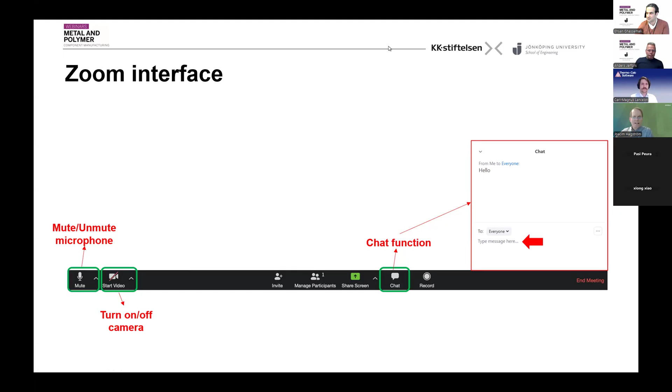See if I can do this.

Hello everyone. This seminar today is part, the final part, of a pre-study, genomförbarhetsstudie, within the program Metals and Minerals, sponsored by Vinnova in Sweden.

Joachim, I appreciate if you share your slide or screen. I do not do that. Just need to click on share. Do I have to leave the presentation mode then? Possibly, I thought I pushed share. I think you need to confirm by selecting a screen to share. Okay, I think it's starting. We practiced before, but yes. Okay. Slideshow. Okay, great, perfect, it works. Sorry for this.

This seminar is within this pre-study called Thermodynamic Simulations for the Development of Low Carbon Emission Scrap-Based Aluminium Alloys. The participating parties were the Swedish Aluminium organization with Peter Benson, Thermocalc Software with Carl Magnus and Yang, Jönköping University with Anders, Ehsan and Lucia, and from Swerim myself and my colleagues Sten Wessman and Fang Ting.

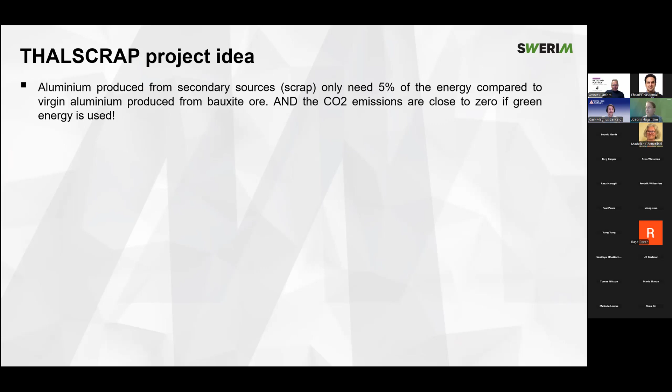The way to go is to increase the usage of scrap, also in high performance, high pressure die cast and wrought products - the mega and giga castings in automotive industry, for example, and extruded profiles and rolled sheet materials, where today it's mainly virgin metal.

The main challenges to do this are the accumulation of unwanted elements like tramp elements, impurities, and non-metallic inclusions, which can have a negative effect on final properties.

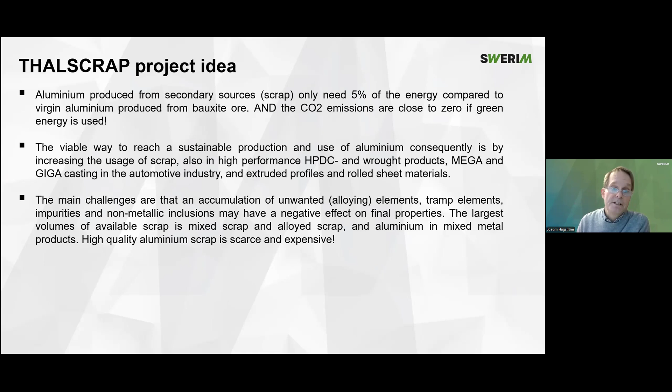The largest volumes of available scrap are not the high quality, well-sorted scrap - it's the mixed scrap and alloy scrap. And already today, the high quality aluminium scrap is expensive, and it can be more expensive than virgin metal.

In this situation, thermodynamic calculations and simulations are useful tools to understand and help predict the influence of variations in composition on microstructure and properties.

This is maybe the core of our project idea: the thermodynamic simulation tools are dependent on high quality information, phase diagrams, and secondary alloys contain more elements and in larger amounts than the alloys we have used in the past. So we need to develop better data.

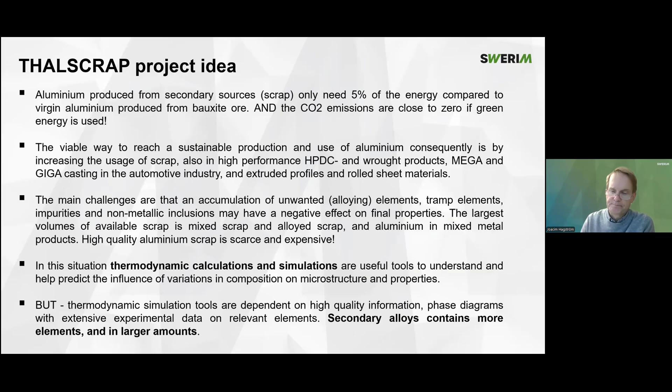Our project aimed to make a gap analysis of available data to understand where we need to make more experiments. This was one of the most important tasks of the project.

We also wanted to improve the competence in industry and among researchers in Sweden, and therefore wanted to produce educational media that can be used for meetings with industry.

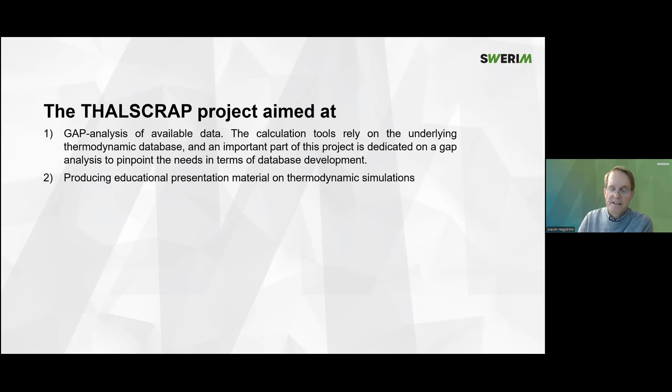The third option was to meet the Swedish aluminium industry, to give seminars and to tell about basic metallurgy and phase diagrams and how these thermodynamic tools can be used.

We also wanted to create demonstration cases to exemplify how alloying elements and impurities affect processing parameters and properties.

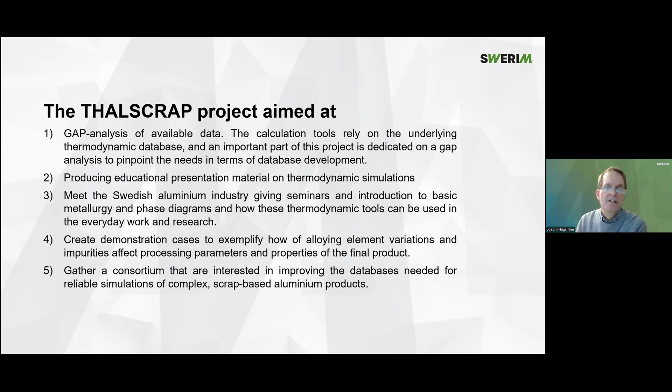One final important thing was also to gather a consortium interested in working with these issues, improving databases needed for simulations of complex scrap-based aluminium products.

Everybody talks about scrap, and we have to use more scrap. The hard truth is that scrap is not really available for everything, so we have to make the low quality scrap available for more high quality products.

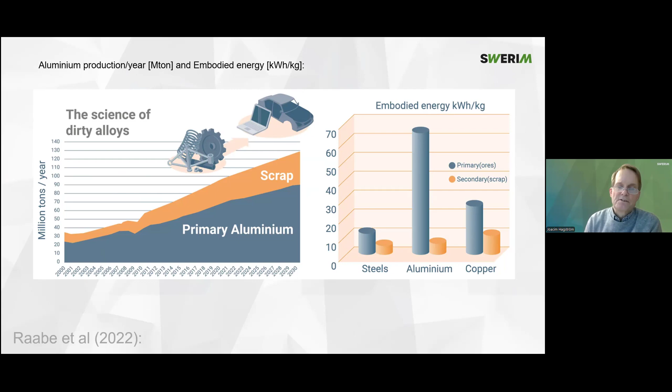This is the forecast of aluminium production in million tons. We will see a quite large increase in the amount of aluminium produced due to automotive electric cars, automotive transports, and many other areas.

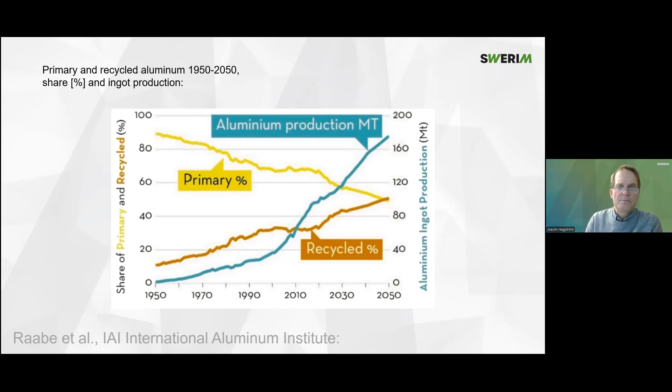We see that the recycled content, according to this graph from a presentation by Raabe, shows that by 2050 we can expect 50% of sources coming from recycled material. So we really have a huge job to do to increase the amount of recycled material.

The project deliverables included a review of existing computational tools for thermodynamic simulations, and user cases with examples of how simulations can be used in industry. This will be presented by Thermo-Calc Software today and Jönköping University.

We also have a review of competences, skills, and tools in the aluminium industry. We made several trips to meet industry and researchers at research and innovation centers to understand the situation.

Now we are here at the final workshop to discuss the results and possibilities. So thank you for...

I'm ready with my part then. Thank you. Good, great, thank you.

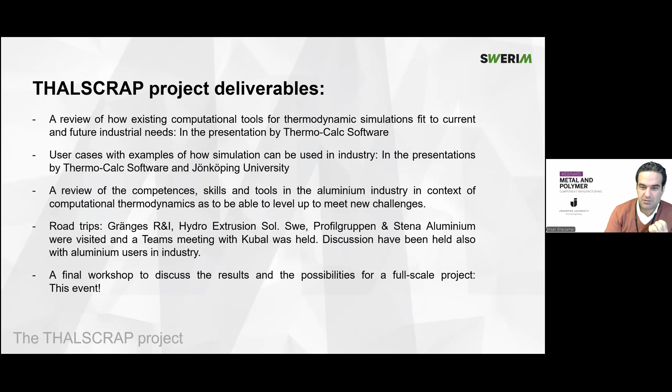Thank you, Joachim. Now we talked about THALSCRAP and Thermo-Calc. Now it's time for Carl Magnus to tell us about phase-based prediction for aluminium alloys, the activities we did also during the THALSCRAP project.

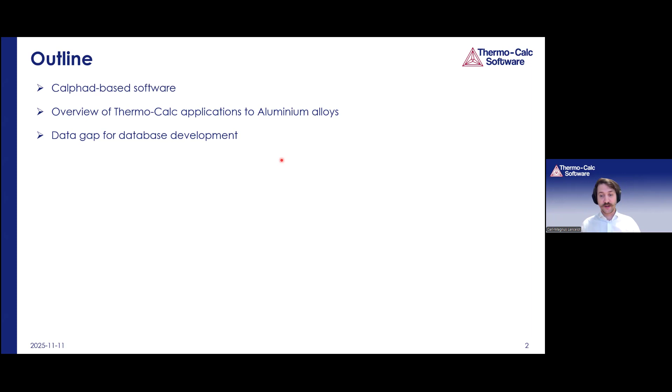Then there are two points, the two work packages that we at Thermo-Calc had during the project. One was to create an educational package that serves as an overview of different ways you can apply Thermo-Calc in the aluminum industry. I will give you an overview of these different applications. The second package is to identify data gaps for improving the database. We have identified a couple that we could work on to improve the thermodynamic predictions in the future larger scale project that Kim introduced.

So why should we work with computational thermodynamics, and who could benefit from using this kind of predictions? Actually, most of the life cycle in the aluminum alloys: the alloy designer who will prepare the chemistry and make a cast, the component producer who takes this cast and makes it into a shape and heat treats it, the component user who takes this component and puts it in a product.

Probably not the end user, the end user would be me who buys a car and drives the car, but also the recycler who will recycle the scrap and then that will go back into the alloy design.

And why should we use computational thermodynamics? Well, we can minimize the need for trial and error, experimental trial and error. That can be very costly if you have to turn off production in order to do experimental trials. It's better to make predictions beforehand in order to narrow down the experimental needs. So you can save time, you can save your development time from the drawing board to the final product.

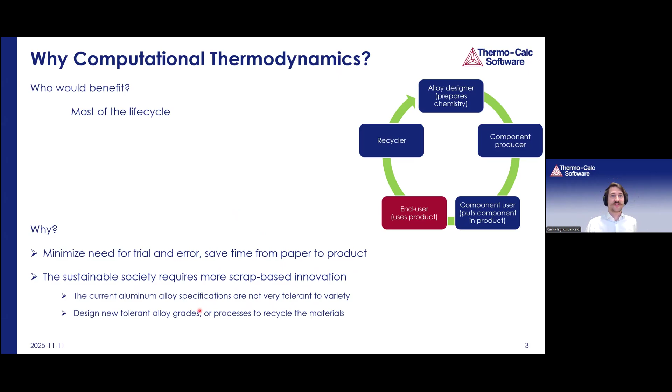And also, as Kim has already introduced, we need to use more recycled aluminum. So in the future sustainable society, we will need more innovation for scrap-based aluminum alloys. The current aluminum alloy specifications are not very tolerant to chemical variety, especially the wrought alloy grades. These can be very sensitive to impurity contents. So it will be important to design new alloy grades that are impurity tolerant, and also design processes to recycle these scrap materials.

Now I'll give an overview of the databases that are the foundation of these predictions we can make in Thermo-Calc. These are CALPHAD databases. CALPHAD stands for calculation of phase diagrams, and we work with phase-based properties. These properties are evaluated for all phases that can appear in a type of alloy. They are developed using experimental data and also atomistic simulations, and they are described as a function of chemistry, temperature, and to a limited extent also pressure.

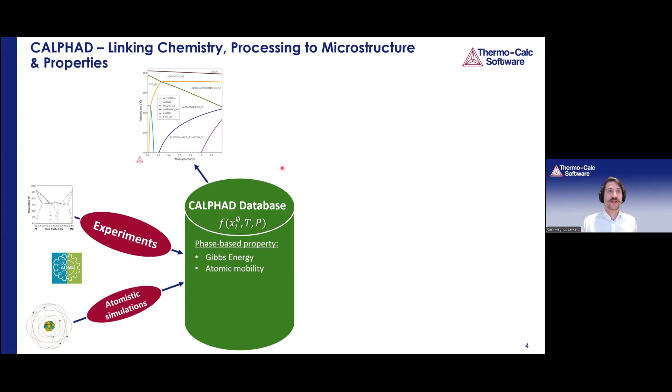The properties are the Gibbs energy, which can be used to derive all kinds of thermodynamic properties, and also the phase equilibria, so we can calculate phase diagrams, and also atomic mobility, so we can simulate the kinetics of phase transformations, and also some thermophysical properties such as molar volume, viscosity and surface tension of the liquid phase, the melt, thermal conductivity and electrical resistivity of the alloys. We're currently working more and more on introducing elastic properties into the databases.

With this, we can simulate the microstructure you will have in the alloy. We can simulate processes such as additive manufacturing or casting, and we can evaluate the properties of the resulting materials and evaluate the performance of the materials. So that's just a very brief overview and summary of the predictions we can make with this CALPHAD software.

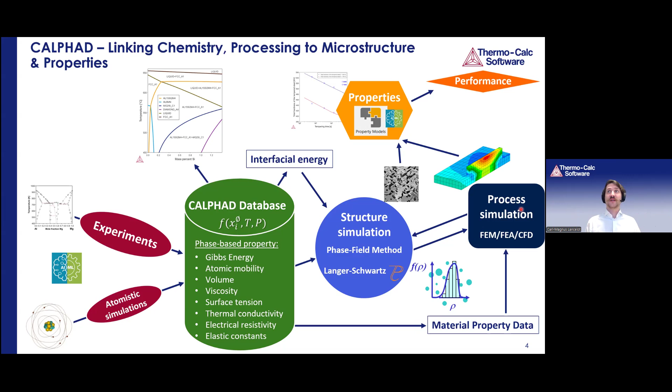So I want to talk about our aluminum database, and our main developer is Yang. During this project, we updated this database to version 10 with some improvements that we managed to identify.

We have 48 elements, all shown here marked in the periodic table. We have aluminum here, then the major alloying elements are green, and the yellow ones are either minor alloying elements or impurity elements. There are over 300 binary systems assessed in this database, over 100 ternary systems, a couple of quaternary systems, and also over 700 phases described in this database.

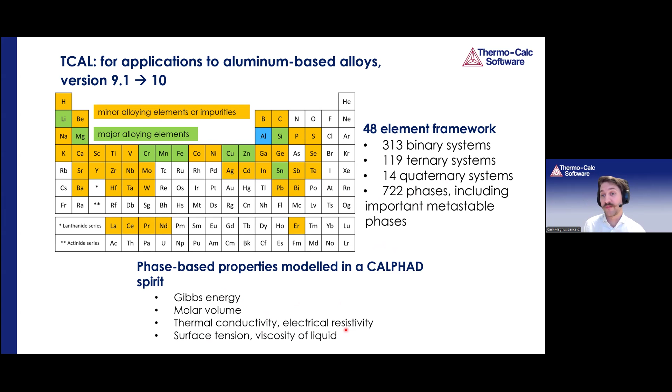So for all of these phases, we have all of these properties described as a function of temperature and chemistry. The properties are the Gibbs energy, molar volume, thermal conductivity, electrical resistivity, and the surface tension and viscosity of the liquid. We have not yet gotten to adding the elastic properties, but that's on the roadmap for the next update of the database, the elastic constants.

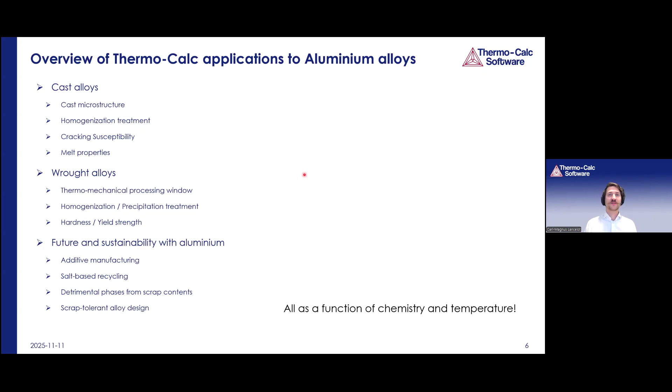I will give an overview of the different applications we can do on cast alloys and wrought alloys, and also talk a bit about the future of aluminum and sustainable aluminum alloys, including predictions we can make as a function of different chemistry and temperature.

For cast aluminum alloys, we want to simulate the cast microstructure, which we can do easily using the Scheil-Gulliver equations in the Scheil calculations. We can simulate dendrites, eutectics, and intermetallic compounds forming, including the segregation profile during the growth of these dendrites as a function of cooling rate.

We can bring this information into a diffusion simulation to simulate the homogenization of this cast structure, simulating the flattening of these segregation profiles. Here is an example for 12 hours at 540 degrees Celsius, and also the dissolution time for detrimental intermetallic compounds such as the Mg2Si phase.

Also very important to cast alloys is the hot cracking or hot tearing susceptibility. We have a model in the software for this, with different kinds of models you can select, and we can calculate this as a function of different chemistries. In this example, we have a multi-component alloy with many impurity elements, and we vary the copper and zirconium content to see how the alloying lowers the hot cracking susceptibility.

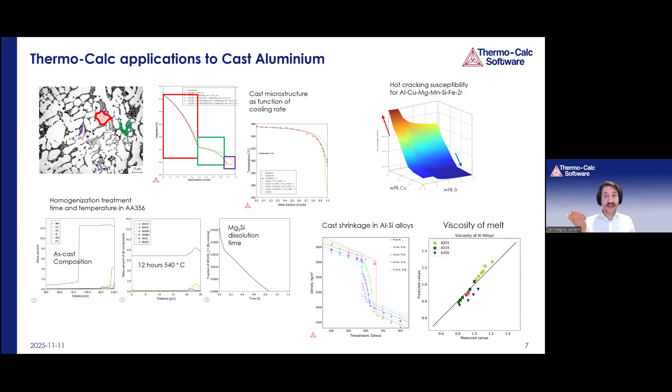Also important are the casting and melt properties: the cast shrinkage, so the increase in density or decrease in volume during solidification, or the viscosity, shown here for a couple of different cast alloys. This is very important for the behavior of the melt, the flowability, and so on.

Next, a quick overview of applications to wrought aluminum alloys. For wrought aluminum alloys, we do thermomechanical processing, so we can identify processing windows. This example is on alloy 6063, but you can do this on any alloy grade. Here we show the equilibrium phase fractions as a function of temperature, representing the microstructure you will have at different temperatures, so you can identify temperature limits.

For example, here is the solvus temperature for the formation of Mg2Si, which is a problematic intermetallic compound, setting a lower temperature limit for a processing window. Then we can have an upper temperature limit where we get melting or incipient melting of the alloy. So we have a processing window here, for example for extrusion or other types of processing, but also for homogenization treatment.

We can also simulate the homogenization treatment of this alloy. Here it's interesting to convert the problematic beta particle into the alpha particle, which is better for the properties. We simulated this at 550 degrees, which is between the beta and alpha phases. Then for wrought alloys, you usually do a precipitation and age hardening treatment at a lower temperature, such as 200 or 180 degrees.

We can simulate this in the precipitation modules. Now we're looking at a 6005 alloy grade and the precipitation of beta double prime needles. This is a metastable precipitate, and there's a transformation between spherical and needle morphology. Here we look at the number density of the particles as a function of time during the precipitation treatment, and also the mean radius and aspect ratio of the particle as a function of time.

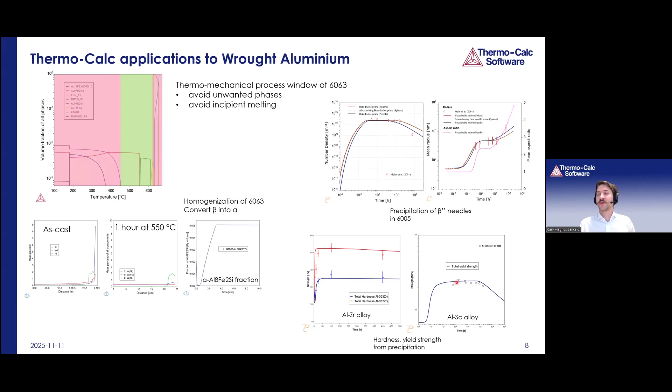These are examples on binary alloys, aluminum-zirconium and aluminum-scandium. Here we are simulating precipitation of aluminum-zirconium precipitates and calculating the Vickers hardness for two different chemistries. On the right is one of our oldest examples of the yield strength model, where we simulate the strengthening effect of the aluminum-3-scandium particles as a function of time.

I want to move on to talk a bit about the future aluminum industry and sustainability with aluminum. 3D printing is becoming more popular.

It's become more popular to try to qualify aluminum alloys for 3D printing. We have this integrated additive manufacturing module where we can simulate the laser powder bed fusion process using all of these different properties that I have just showcased.

Here we have an example of an aluminum silicon 10 magnesium alloy. We can design the printer parameters or design new printable alloys using the modeled melt pool behavior as a function of different laser power, wavelength, laser beam shape and beam radius, and different scan strategies such as scan speed, hatch spacing and hatch rotation. We can model all of this and optimize the printing parameters to avoid defects such as lack of fusion and keyhole porosity.

Moving on a bit towards recycling now, salt fluxes are used commonly to clean the aluminum melt, and we have descriptions in our databases that can help model this, so we can design the salt chemistry for optimal cleaning of the aluminum melt.

Here we have a potassium chloride mixed with magnesium chloride, and we're increasing the proportion of magnesium chloride in the salt flux to look at removing sodium and calcium impurities from the melt. We can see we will reach a satisfactory value here while also maintaining the magnesium content in the melt, since increasing the magnesium chloride in the flux doesn't add very much magnesium to the aluminum melt.

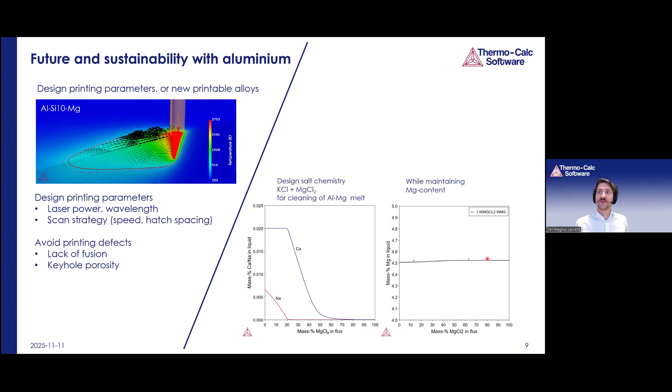Looking forward into the future of scrap-tolerant aluminum alloys, there are several publications in the literature where Thermo-Calc is used to design new types of scrap-tolerant alloys. These are mostly cast alloys, because cast alloys are a bit easier and more tolerant to impurities. I wanted to highlight at least two papers here.

One is by Pavel Shurkin et al. from 2021, where they looked at an aluminum zinc magnesium alloy. Here is a heat treatment window for the alloy, where the dashed lines are the curves of the volume fractions of the phases. We have a treatment window with 100% FCC phase, and then adding iron and silicon impurities removes this processing window so it's no longer processable. They made further predictions to design a new high strength, iron-silicon-tolerant aluminum alloy.

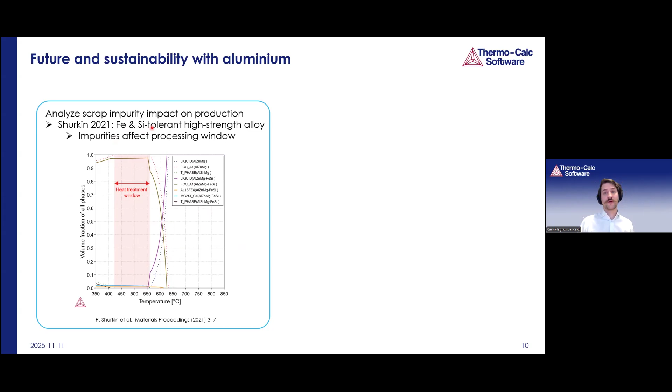Another more recent paper, quite nice, is by Jon Michael Sanchez et al. from this year. They designed a fully post-consumer scrap-based cast alloy. They had sorted scrap into maybe six different categories with different chemistry ranges, and did a high throughput calculation in Thermo-Calc to screen the properties of 94 different chemistries.

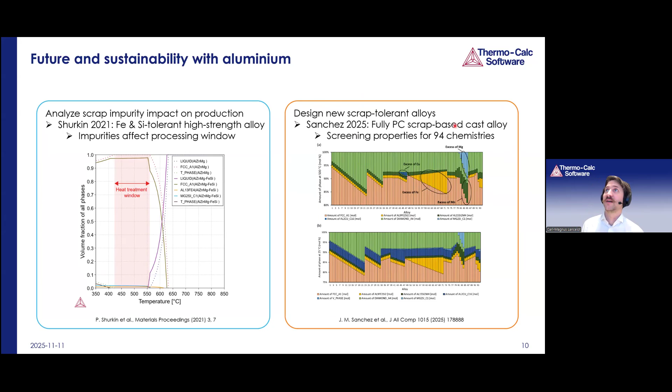They made these quite interesting column diagrams showing the volume fractions of all the different phases at different temperatures, here at 500 degrees and 25 degrees. At high temperature you can look at the detrimental phases that will form during casting, and also homogenization windows. At low temperatures you might look at other phases that can be problematic. They also looked at other important properties such as the density of the alloy, producing a castable, good strength, fully scrap-based alloy using these tools.

Coming back to our work packages, that was a review of the current status and capabilities with our databases and tools. I want to talk a bit more about the next step, the gap analysis, which was mainly performed by my colleague Yang Yang, the database developer here.

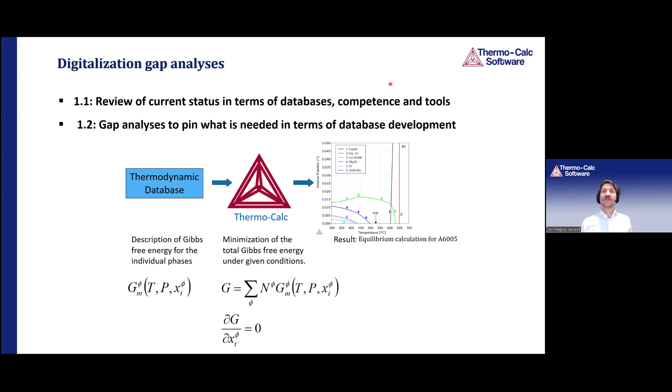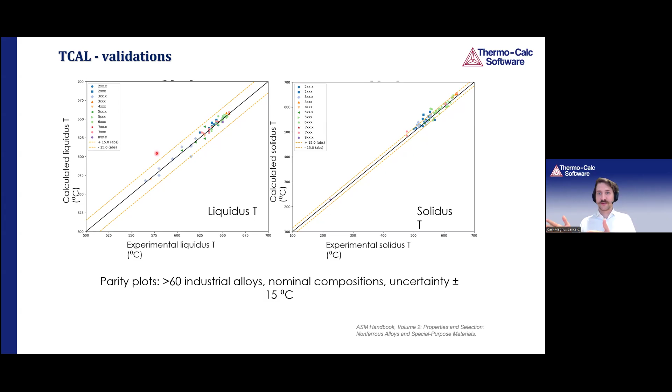She's doing the validation work of the database, validating it for many different multi-component alloys, calculating important properties such as the solidus and liquidus temperature for a large number of commercial alloys, both wrought and cast. We see pretty good agreement, within plus or minus 15 degrees for solidus and liquidus, and we can also see which outliers appear in the predictions, which helps identify areas for improvement.

Most importantly, in order to improve predictions on multi-component alloys, we need to identify critical ternary systems important for these scrap impurities that contaminate the alloys. Yang managed to identify quite a few and improve a few of them during the project.

One of them is aluminum iron manganese, which was improved for version 10 of the database. There was some deficient data in a certain temperature range where the data points were conflicting, possibly due to contamination in the literature data points, so she made critical judgment calls and improved the description.

Aluminum chromium iron was actually not described before because there was limited data available, but now with new data we were able to assess this ternary system and add it to the database, which will be very important for predictions involving chromium and iron based intermetallic phases.

Another ternary, aluminum copper manganese system. There's very deficient data available from the 60s, so this is a system where we have an opportunity to create new data. If we can create high quality ternary data, we could rule out some inconsistencies in the old data.

And improve this system. Aluminum copper iron system was also improved during this project. We managed to improve the copper solubility in several aluminum iron based intermetallic phases, which is very important for scrap based alloys. Another ternary, aluminum iron magnesium system.

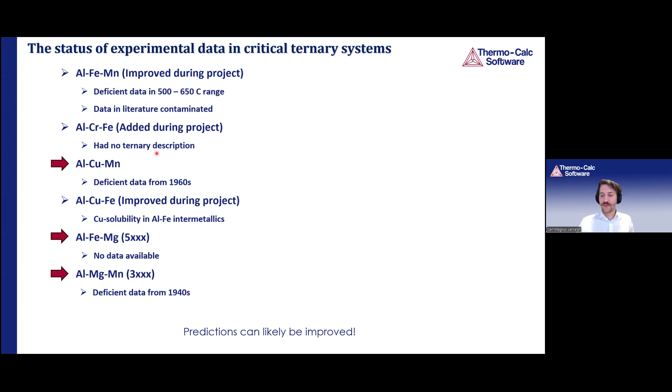And what experiments do we need to do? I want to emphasize that it's most important to generate high quality ternary alloy data, much better than multi-component alloy data. Multi-component alloy data is good for validation of the database and identifying areas of improvement, but high quality ternary alloy data is important to be able to improve the database.

So a very cheap method is to make isothermal heat treatments. You define, here's a schematic ternary.

We lost your sound, Carl Magnus.

And we also have a ternary intermetallic compound here, and we have some two-phase regions with the green tie lines, and also these red triangles are three-phase triangles. So if we can prepare sample chemistries to try and pinpoint them into these two-phase or three-phase regions, we can gather a lot of ternary phase diagram data in a single furnace heat treatment.

And we can also put samples for different alloy systems in the same furnace. Then if we do this for a couple of temperatures, 3 or 4 temperatures, then we have gathered a wealth of data that we can use to assess these ternary systems.

Combine it with some XRD and maybe EBSD, that will help phase characterization a lot. And also DSC, or even cheaper DTA analysis, differential thermal analysis, is used to identify phase transformation temperatures.

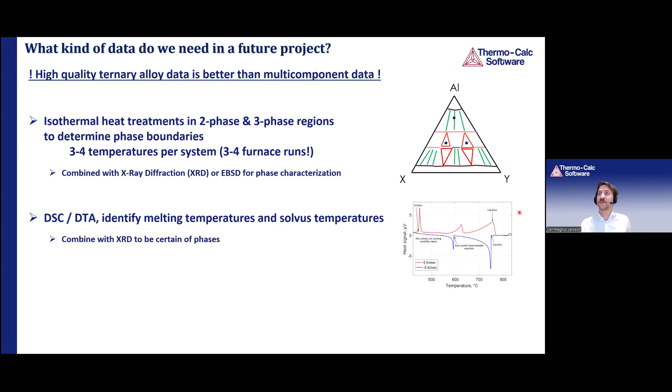So here we can scan the liquidus projection of a ternary system, so we can get the liquidus and the solidus, and also some solid phase transformation temperatures. We can combine it with XRD if we want to really be certain of the phase characterization there.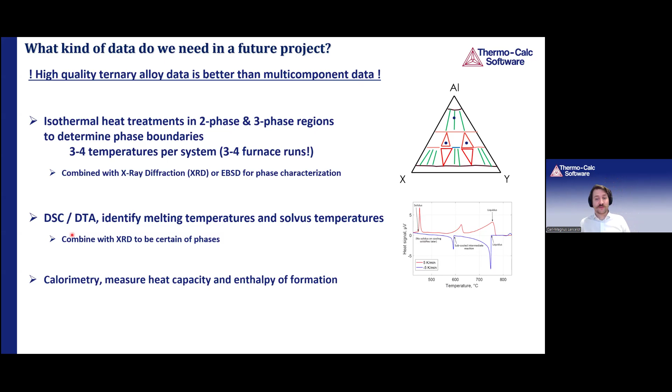And maybe a bit more expensive method, but also very useful, calorimetry. We can measure heat capacity and enthalpy of formation if we find some new ternary compounds. This will generate very important data for the assessments.

All right, and that was all that I had to present about our two work packages in this project. Thank you all for listening to me, and I hand back over to Esan and Anders.

Perfect. Thank you very much, Carl Magnus. Very interesting insights on Thermo-Calc, and as we know, and as you also briefly mentioned, the capabilities of Thermo-Calc are endless, sounds like, and a lot of potential to use it more, even for scrap material in aluminium.

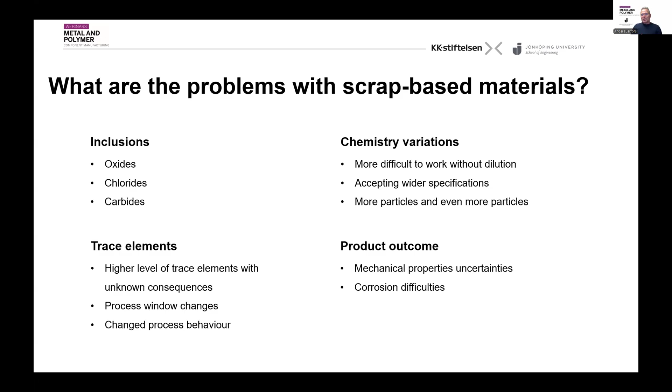And this has led to a normal way where you either dilute or downcycle. So you have a heat, a source and sink paradigm that we've been working with so far. This is a source and sink diagram where you have the scrap source types on the left: 1100, 3000 series, 5000 series, 6000 series, and then your typical cast materials with 319, 356, 380, and 390 being the sources. At the bottom you have the sink alloys.

If you take, for instance, the 6000 series, 6061, you can actually produce an 1100 series material. But what will be limiting there is the copper and silicon content. That limits, as you can see by the color, that you can take no more than 10% of this material because it's limited by copper and silicon. So with wrought materials, the 1000 series, often magnesium is the limiting element. And if the source is coming from cast alloys, making wrought materials is very challenging because copper and silicon are the challenges.

Now, if you look at the wrought materials, take the 5000 series, for instance, and choose the 300 series cast alloys as the sinks, you see magnesium is also dominant here. But because the cast alloys have a higher tolerance for these materials, you can actually increase the amount of wrought materials used. So you move up and turn more toward the green or blue range of alloying elements. This has been, so to say, the forgiving paradigm.

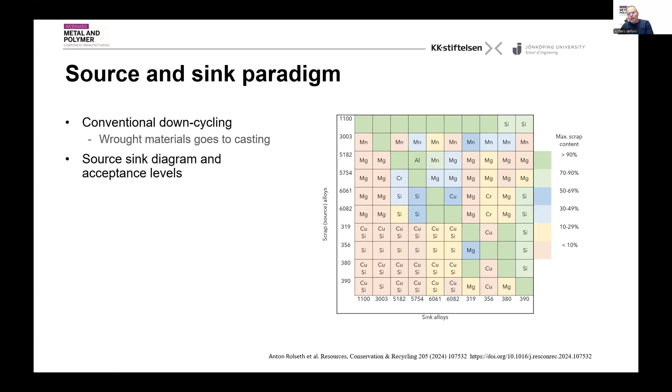Now what happens is that there's been some work where you take a shredded car and remove as much of the iron and all the non-metallic impurities that you can, and you end up with the aluminium composition. So what we have here are three different scenarios.

If you take the internal combustion engine data, these are based on experimental data where people have shredded cars and separated out the internal combustion components. The leftmost bar shows just above 5% silicon in the Zorba scrap. You have 0.5% iron, 0.7% copper, 0.3% manganese, 0.75% magnesium, and 0.41% zinc in the scrap that comes out of this shredded material. This is what you need to work with.

This is what comes out as Zorba. But if you look at the cast alloys, which is the downcycling part, they typically have maybe 10% silicon, meaning you need to add silicon. If you take data from our recyclers, 20% of the energy that goes into recycling the material, making cast alloys from Zorba scrap, is the addition of silicon.

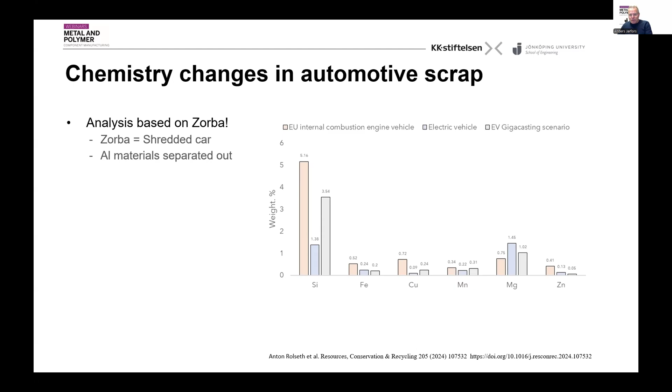So if you take the next slide, the conclusion is that we have a number of alloying elements in the aluminium scrap mix. If we just look at electrification, we have less copper, less silicon, but more magnesium. And remember, magnesium was one of the elements that put a limitation. So if we put scrap back into our alloying element cycle, it will be even more limiting because of the increment in magnesium content.

Now gigacasting won't really strongly affect that, but it will put some silicon back into the system, and there's a window here. If we start using alloys with less silicon, we can also reduce the carbon footprint. This is an interesting concept.

Now what we saw from Kim's presentation is that there will be a deficiency of aluminium. Our studies looked at closed recycling in the automotive industry, a closed circuit recycling system. We can go to the next slide.

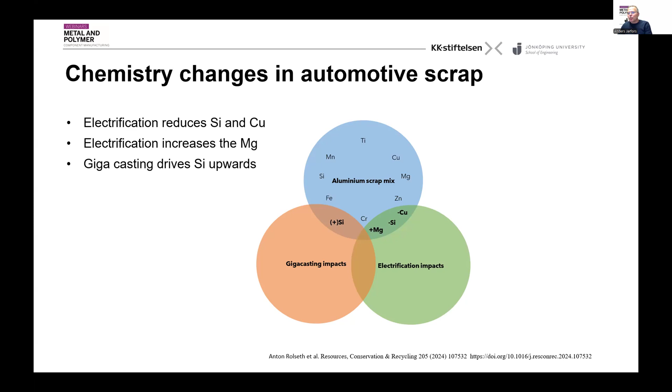We can see that the deficiencies in 2060 would be in the order of some 20 megatons of aluminium. But there isn't really that big a deal between the combustion engines and the electric vehicles and the mega casting scenarios. So this is something that's about the same level of issues.

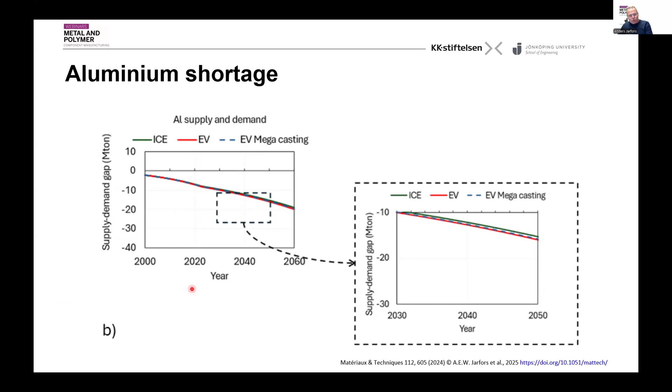But the interesting portion is what happens with the alloying elements, because the scrap that comes back from the cars will be richer in magnesium than what the automotive industry actually is using. We can see that silicon around 2037 will be higher, and magnesium will be higher. So one of the abilities we need to work with is to use the scrap as an alloying system, being able to do more complex alloys and returning the scrap into a cycle of more qualified alloys. So that's the challenge.

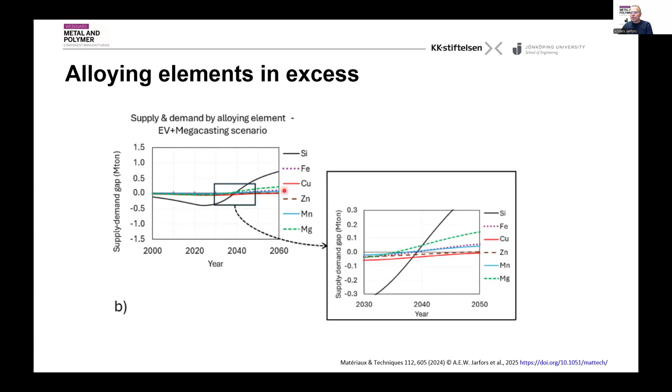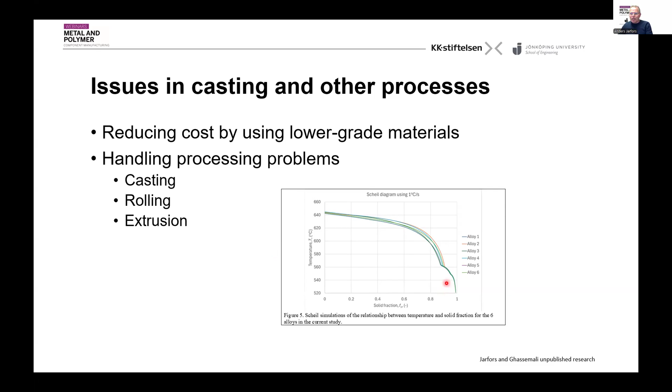This is an example where we've been calculating the hot tearing index of the materials as a function of different compositions. This is a plot we've done using Thermo-Calc and the Scheil equations, and we're working on our own model in order to produce this. We've been doing 500,000 of these Scheil calculations, trying to show how the various elements are behaving in this system. So you can get data out of this as a qualitative measure, but there are also issues in actually fitting this to the experimental work as well.

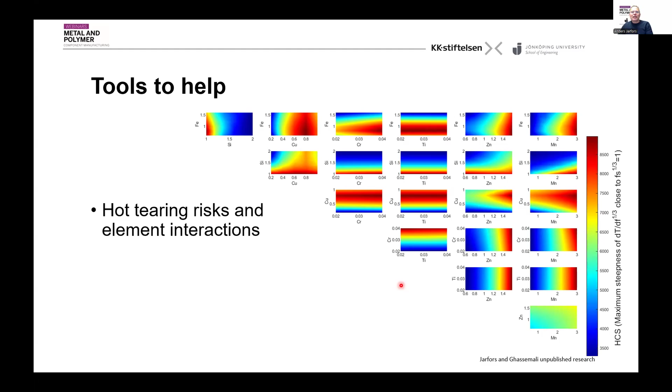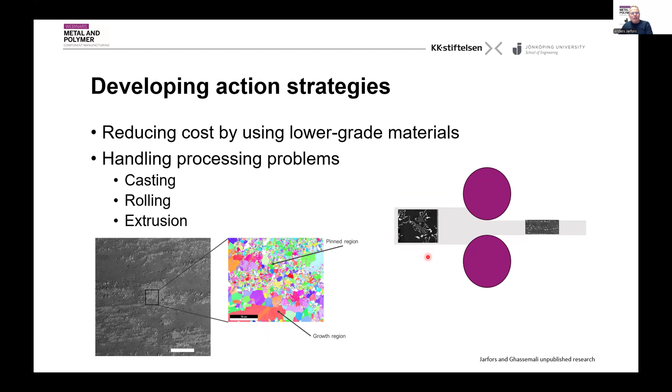Now, when it comes to developing strategies, we need to think about what is happening when you do this. This is an example from rolling. We talked about particles - you can see the rolled structure to the left, this is the particle richness, and then you get the microstructures. So what we have is an influence of the homogeneity of the microstructure as a consequence of increased particle content. And then this needs to be rolled or extruded or cast in some way.

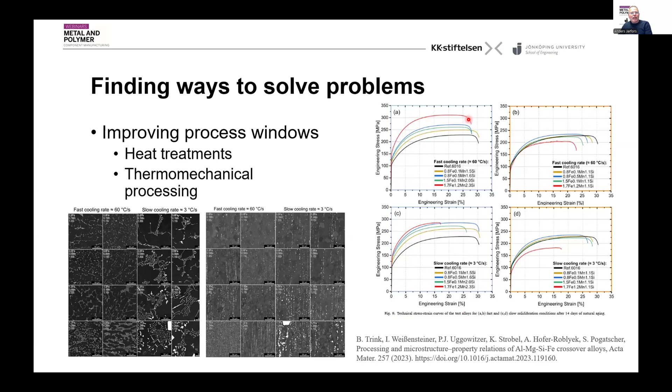So the key points of the benefits we can see: one part is that we can reduce cost and climate impact by smarter alloying. We can reverse the downcycling and try to start working with upcycling instead. We can be more prepared for the change in scrap supply mix, because we know that what comes back as Zorba scrap will not be constant in composition - it will reduce in silicon content. What we need to do is cast with better care, meaning reduced silicon content, and maybe we can accept higher iron contents. When it comes to raw materials, it's particles, particles, and particles - we need to keep those under control. And then we need to improve our capability and understanding of the combination of rolling and forming together with the casting of these materials. I think that's my last slide.

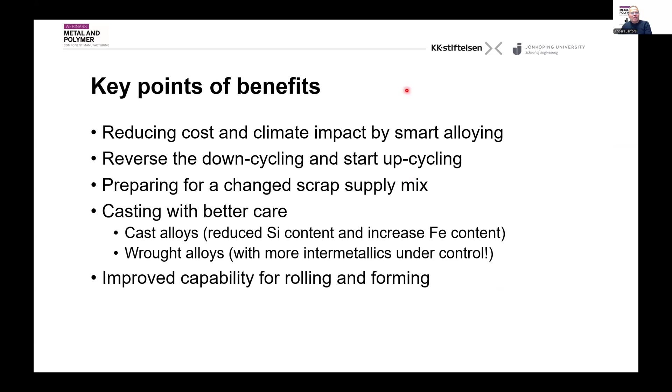Well, the summary is that scrap supply will change in nature and chemical composition will change. And there are some powerful tools that we will use here. So thank you for this.